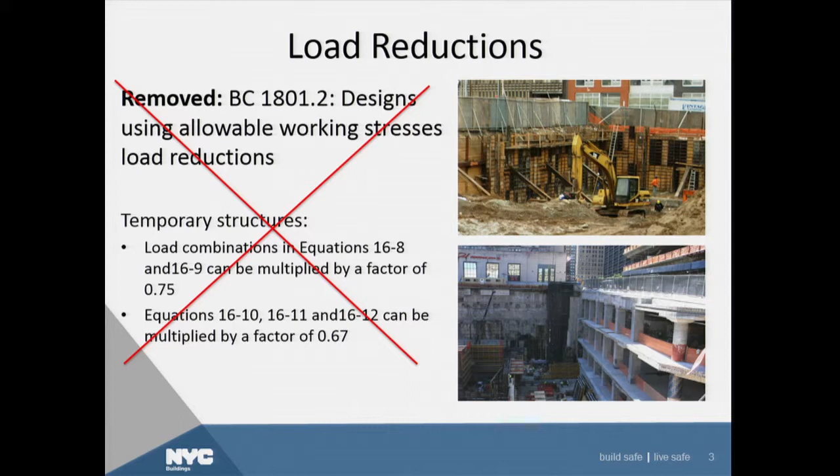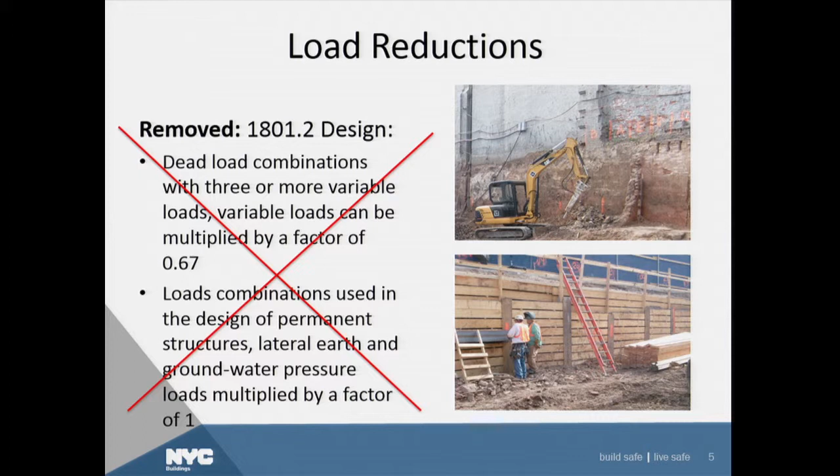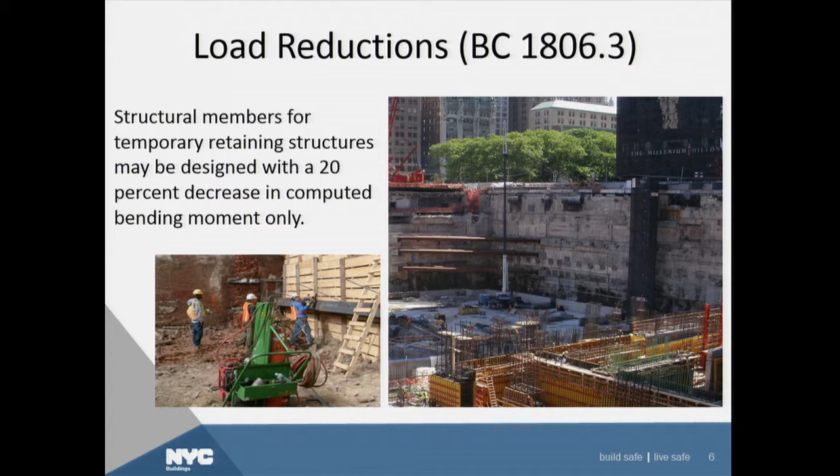Additionally, with this section, dead load combinations with 3 or more variable loads, variable loads can be multiplied by a factor of 0.67. Load combinations used in the design of permanent structures, lateral earth and groundwater pressures, loads multiplied by a factor of 1. This is gone. And a new section, BC 1806.3, which is more specific to temporary retaining structures, supportive excavations, things like that. For these particular types of structures, the structural members for temporary retaining structures may be designed with a 20% decrease in computed bending moment only. So I think this is a good compromise.

Delving into the definition section of BC 1801.3, there were a lot of new definitions added to clarify either new sections that were added or just to add clarity to the code. Free and fixed-headed piles, there's a new definition for. Shallow foundations, there's a new definition for. Underpinning, waterproofing, retaining walls, helical piles, geotechnical capacity of deep foundations, liquefaction, and piers. So I'll go into greater detail on some of these definitions, but not all.

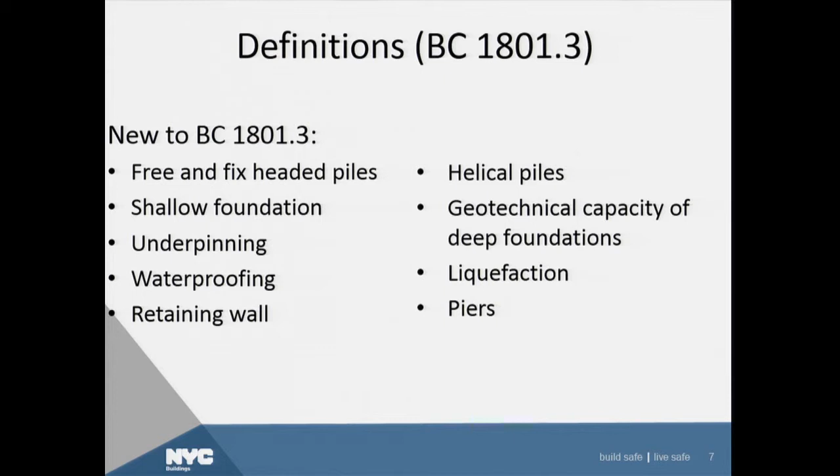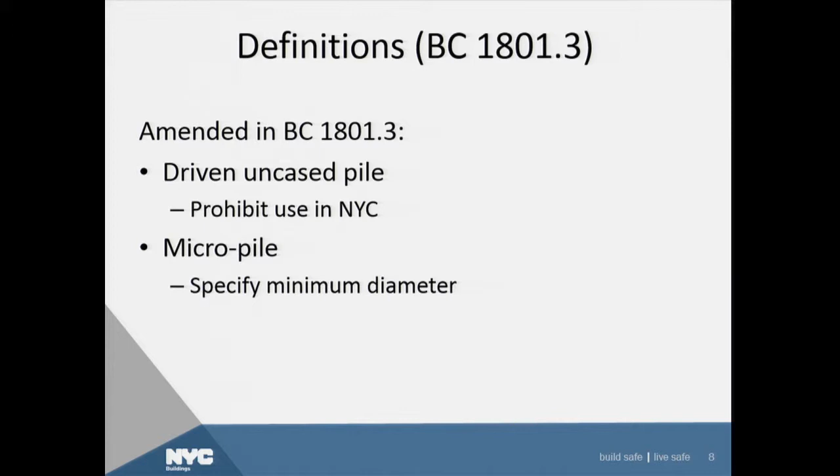A couple of definitions were amended. Specifically, driven uncased piles was amended to clarify that these particular types of piles are prohibited for use in New York City. The committee felt as though the type of installation couldn't guarantee construction quality, and it's our understanding that they're not used widely in New York City, so these are now prohibited. And micropiles, the definition was amended to specify a minimum diameter. There was a lot of questions about the minimum diameter of micropiles, and that's been clarified.

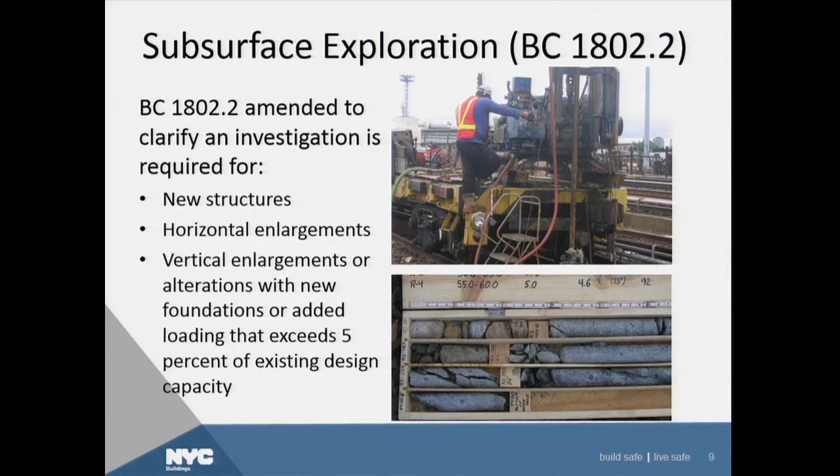With regard to subsurface explorations, in the 2008 code, it was a little unclear how to deal with certain types of alterations to buildings. So new structures, it's pretty clear you're required to do a subsurface exploration. Horizontal enlargements, now it's explicit that subsurface explorations or investigations are required. However, for vertical enlargements or alterations with new foundations or added loads that exceed 5% of existing design capacity, now we're explicitly stating that a subsurface investigation is required to verify that the subsurface and soils are adequate for those increased loads. This table is...

This table illustrates the difference between the 2008 New York City Building Code and the 2014 New York City Building Code scoping section, specifically the number of borings required. This particular table deals with non-pile supported structures only, and when we're talking about the number of borings, it's the built-over area we're using, basically the footprint of the building. So for small buildings with a 750 square foot footprint, one boring is required per the 2014 code, whereas 2 borings are required under the 2008 New York City Building Code. Pretty much once you exceed 750 square feet, there's really no difference. Another note: retaining walls with a height that exceeds 10 feet require 1 boring for every 50 linear feet. This is a clarification that was not in the 2008 New York City Building Code.

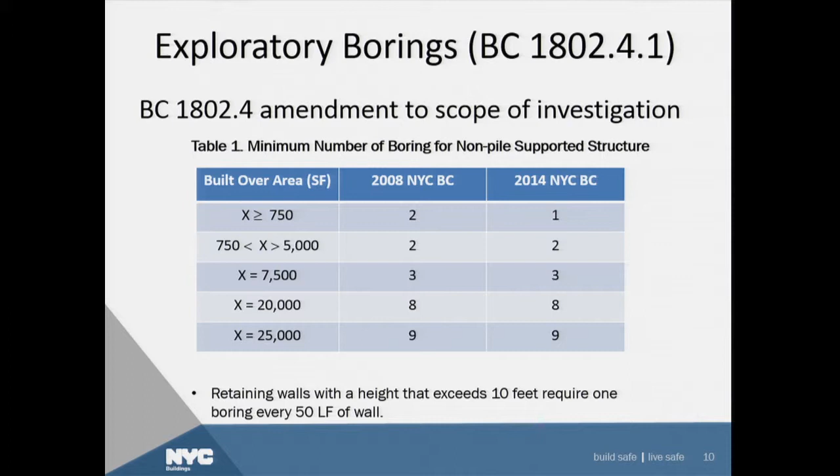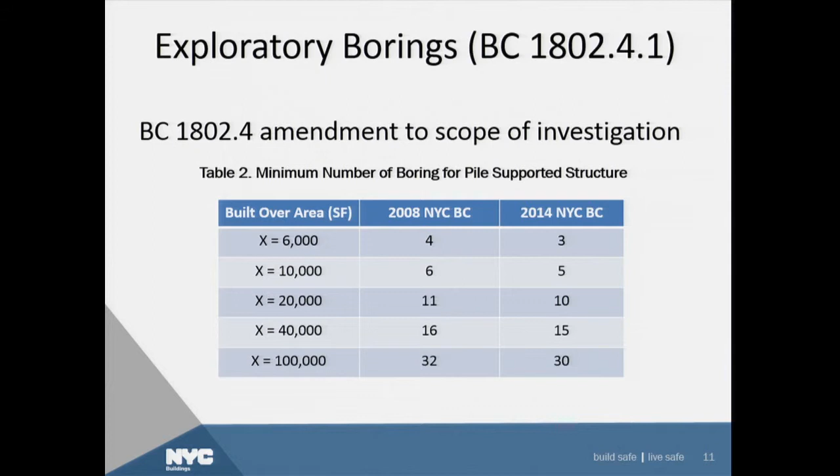This particular table deals with pile-supported structures, so there's a different criteria for those. When you have a building that's 6,000 square foot built over area, you're only required 3 borings for the 2014 code and 4 borings for the 2008 code. You can see they're basically 2 different equations moving at a different slope. So when you get to a built over area of 100,000 square feet, that's where you start to see an additional boring savings. So that's something to look forward to.

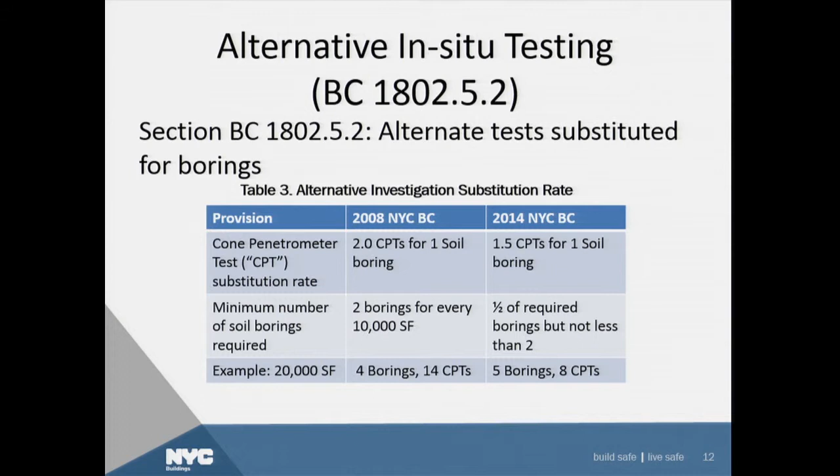A quick example here: a 20,000 square foot building would require 4 borings and 14 CPTs when alternate tests are proposed for the 2008 New York City Building Code, whereas the 2014 Building Code would require 5 borings, but only 8 CPTs. So you have to do 1 more boring for the 2014 Building Code, but the number of CPTs is significantly reduced.

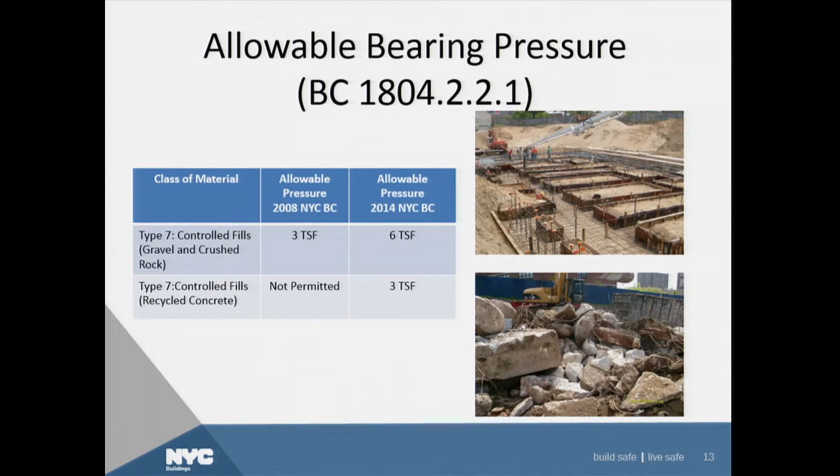Another nice change here: the allowable bearing pressures of certain type 7 soils was changed or increased. Gravel and crushed rock previously had a 3 ton per square foot allowable bearing pressure. That has been increased to 6 tons per square foot. And concrete fill was previously not permitted as a structural fill, but the 2014 Building Code is going to permit it as a structural fill with an allowable bearing pressure of 3 tons per square foot.

Some of the highlights to the shallow foundation section, BC 1805. This was previously called footings. Shallow foundation is a new term, an IBC term, so that's a widespread change to the building code, Chapter 18.

Grade beams: an exemption was added to make explicit that grade beams are exempt from frost protection requirements. There was often question about whether grade beams were required to be located below the frost line. That's not the case. Additionally, piers were relocated to the shallow foundation section. The committee felt they are more appropriately located in this section, and it makes explicit that pile load tests don't apply to pier foundations.

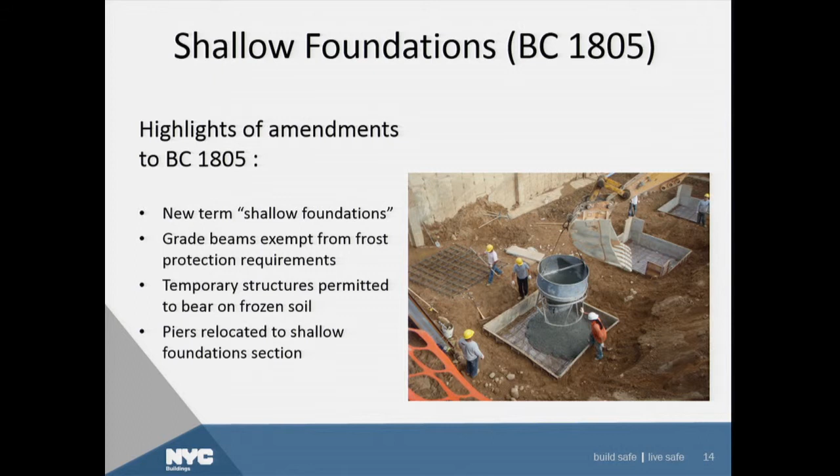The damp proofing and waterproofing section was significantly amended. The prescriptive requirements from its legacy text from the 2008 code and from the 68 code was removed. Previously they had very, I don't want to say outdated, maybe they were outdated provisions, and the committee felt there are a lot more options out there and that it should be more of a performance-based section, so that was removed.

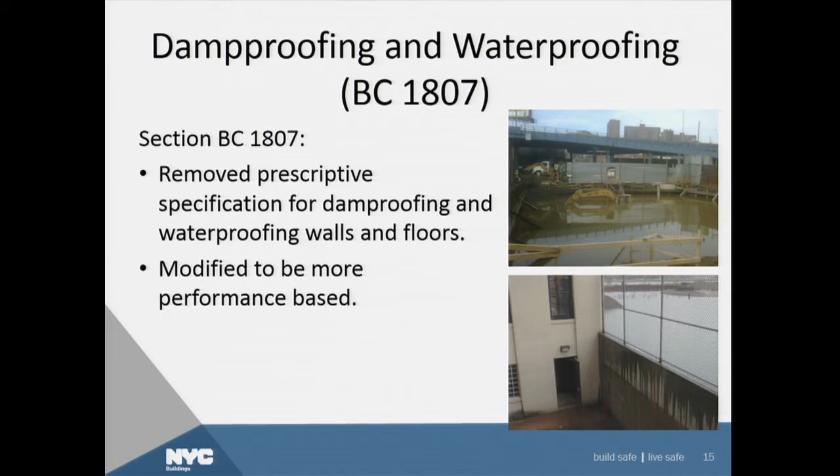With regard to deep foundations, this is a new term also. Previously, piles, the section was pile foundations, and now we're calling it deep foundations. This is consistent with the International Building Code. We have a new or amended definition for micropiles: a drilled and grouted deep foundation element with a diameter that measures between 5 and 14 inches that develops its load-carrying capacity by means of a bond zone in soil. Previously, a cased concrete pile had a minimum diameter of 8 inches, so this is making clear that a diameter less than 8 inches is acceptable for micropiles.

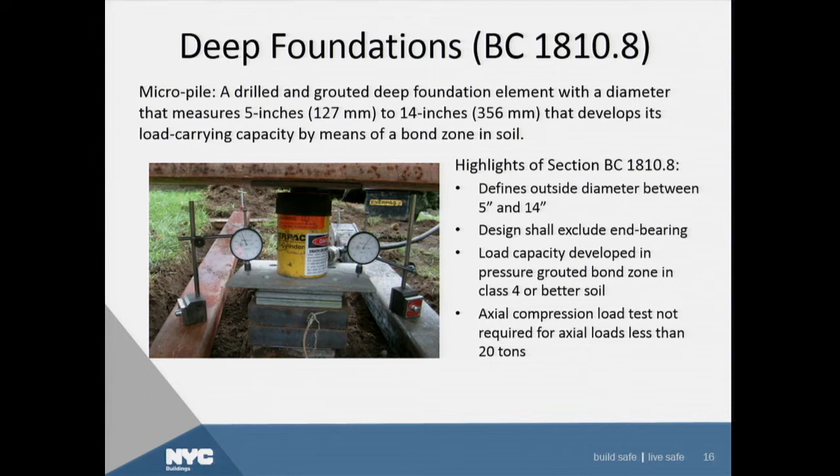Some highlights of section 1810.8, obviously I've gone over the diameter. One thing to keep in mind is that the design shall exclude end bearing - this is just a friction pile. The load carrying capacity is developed in a pressure grouted bond zone in a class 4 or better soil. So silt type soils, class 5 soils, this particular type of pile is not suitable for that class of soil. Additionally, axial compression load tests are not required for loads less than 20 tons for micropiles.

Deep foundations, again, helical piles. A new definition was added. Helical piles are defined as a manufactured deep foundation steel element consisting of a shaft and one or more helical bearing plates, or helices, screwed into the ground by application of torque on the shaft. Some of the highlights of section 1812: one thing to keep in mind is that helical piles require approval in accordance with 28-113.2.

So the takeaway is that all helical piles are not created equal, and there is a helical pile buildings bulletin which will be amended to reflect changes in the building code, but it does accurately reflect how a helical pile is approved and accepted by the department. If you look at the lower picture in the middle, this particular helical pile has a sticker on it that says ICC ES Legacy Report number 9504B. This pile was evaluated and approved by ICC, so it's acceptable for use in New York City. I would look to the building code and the buildings bulletin, which will be revised, to verify exactly how helical piles are considered and deemed acceptable.

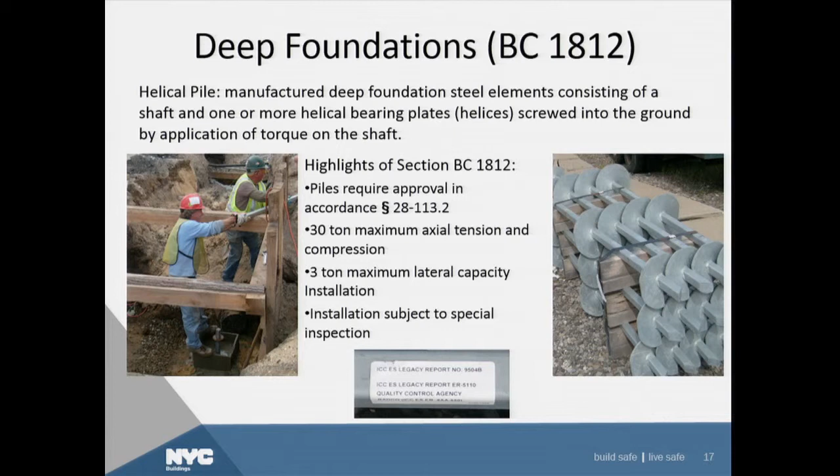Splices. From this splicing section, it states that in all cases, splices shall develop at least 50% of the capacity of the pile in bending. This section hasn't really changed except for an exception for caissons, specifically caisson core beams. The committee felt that caisson core beams shouldn't necessarily have to meet the requirements above because the loads in the caisson core beam wouldn't get this high. So there's an exception for caisson core beams stating that splices should be designed for the lesser of 50% of the capacity of the core in bending, or 2 times the design bending moment carried by the core at the location of the splice. This should result in a savings for splicing. Keep in mind that core splices must not be within 2 caisson diameters of any splice in the casing.

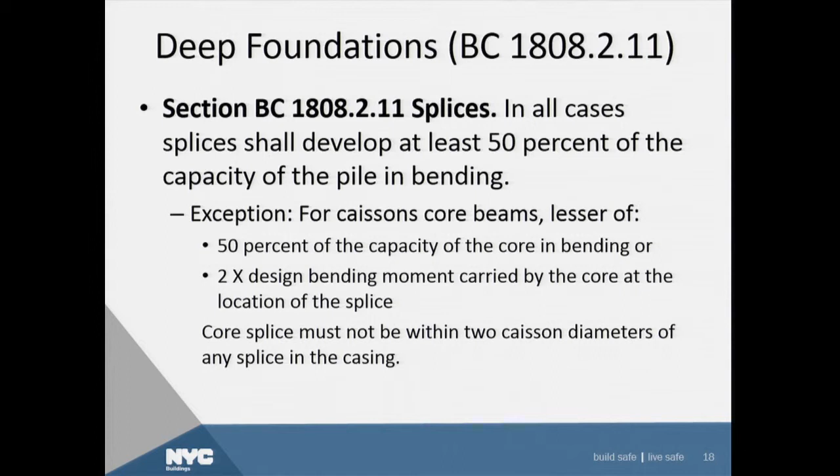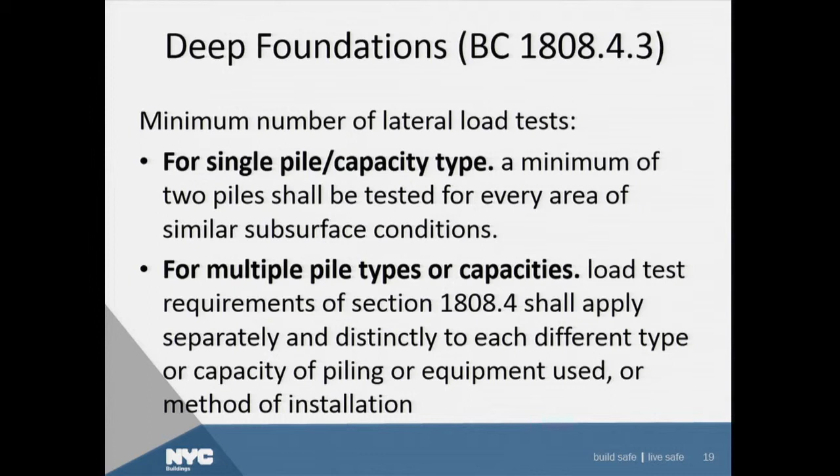The 2008 New York City Building Code was a little scant on the number of lateral load tests, just specifying the number with no guidance on how many are required when lateral loads exceed 1 ton. So if the lateral loads exceed 1 ton, then lateral load tests are required. For a single pile or capacity, a minimum of 2 piles must be tested for every area of similar subsurface condition. For multiple pile types or capacities, load test requirements of 1808.4 shall apply separately and distinctly to each different type or capacity, pile, equipment used, or method of installation. The takeaway is that if you're using different types of piles in different conditions, then probably more pile load tests are required.

There was a new table added which consolidated all of the allowable stresses for materials used in piles. This is consistent with IBC, and it's good because all of the maximum allowable stresses are now located in one table.

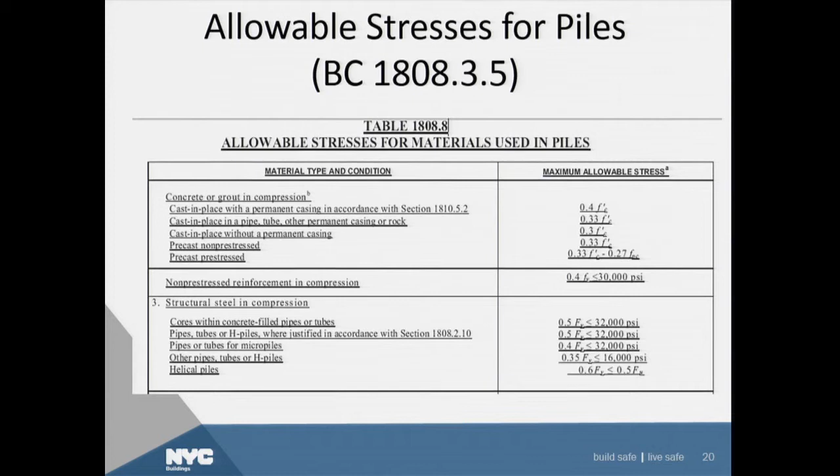With regard to liquefaction, as Gus previously mentioned, the building code now adopts ASCE 7-10 for seismic provisions. Because liquefaction is primarily a seismic phenomenon, we adopted ASCE 7-10 for this section. This section was amended, and all of the screening and analysis requirements of ASCE 7-10 were incorporated. One thing to note is that per ASCE 7-10 section 11.8.3, the potential for liquefaction screening must be evaluated for site peak ground accelerations consistent with the maximum considered earthquake peak ground acceleration. This will result in screening to a higher acceleration than previously in the 2008 New York City Building Code.

Section 1813.1 was amended to clarify that clays, silts, and clayey silts below the water table with a plasticity index less than 20 have to be considered for liquefaction potential. And as for 1813.2, site-specific analysis, it was clarified that borings used to evaluate liquefaction have to be performed in accordance with ASTM D6066.

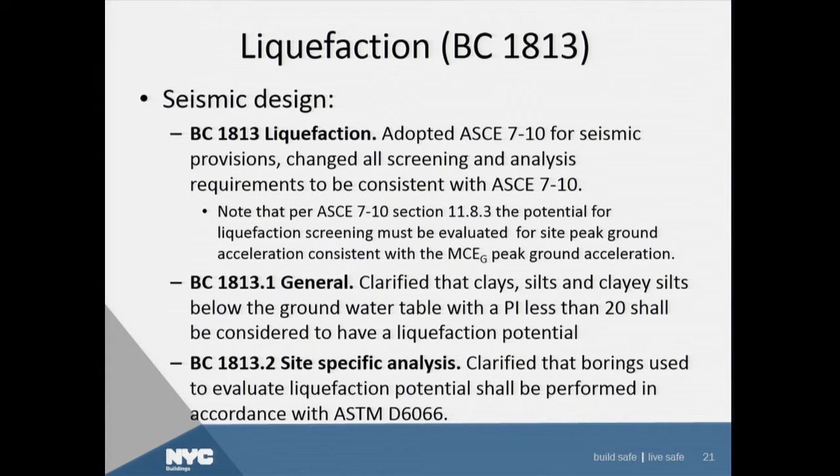Further on liquefaction, BC 1813.2.1, peak ground accelerations. For consistency with ASCE 7-10, a new table was added. This table 1813.2.1 shows all of the values of the maximum considered earthquake geometric mean, peak ground accelerations adjusted for site class effects. Additionally, foundation design and analysis definitions were improved and required relationships were changed so that the cyclic resistance ratio and the cyclic stress ratio reflect ASCE 7-10. Lastly, the liquefaction assessment diagram was modified for consistency with ASCE 7-10 and ease of use.

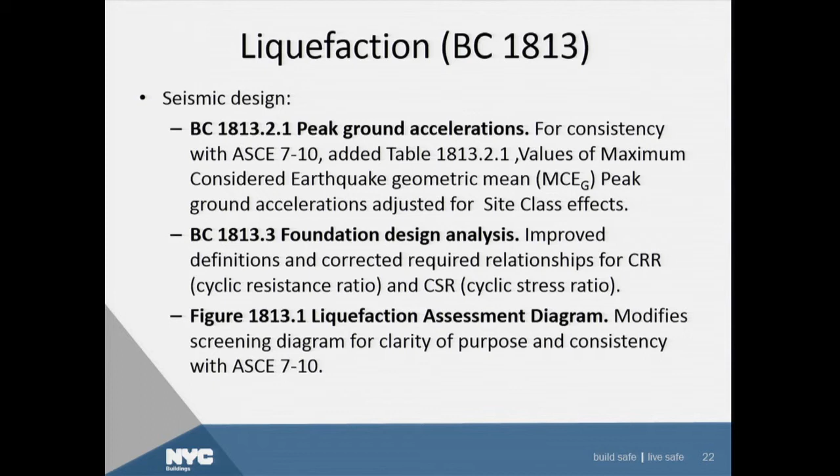As for the underpinning and support of adjacent structures, this section's title was changed, and the general scoping provisions were expanded to include protection of property not containing structures. So if you're supporting excavation adjacent to a piece of property that doesn't necessarily have a building on it, you're required to protect that property so the loss of ground doesn't result in the sidewalk sinking or cracking or things like that.

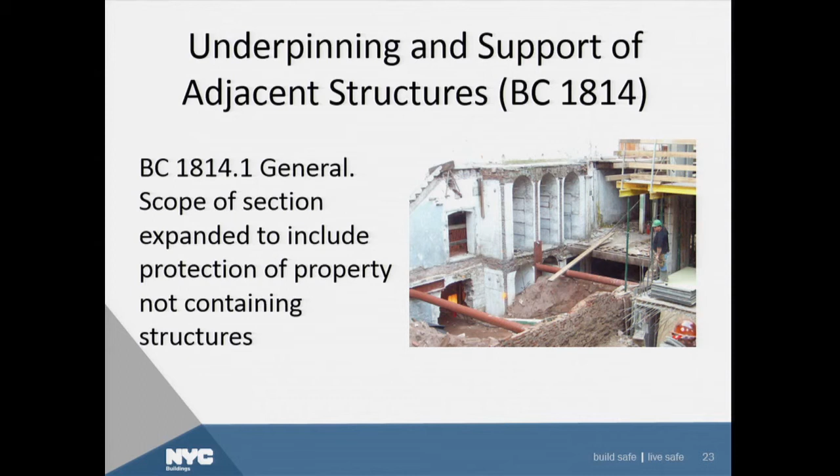Additionally, the underpinning and bracing section 1814.1.1 was modified to clarify that underpinning piers, walls, piles, and footings are designed as permanent structural elements because they will remain in place and carry loads for the duration of that structure. Lastly, this section clarified that underpinning foundations and structures shall be designed to account for lateral pressures exerted on the underpinning. So when the underpinning is in place, lateral loads on the inboard side of that wall could result in an unstable situation if the building is not properly braced.

So I think that's it. It is.